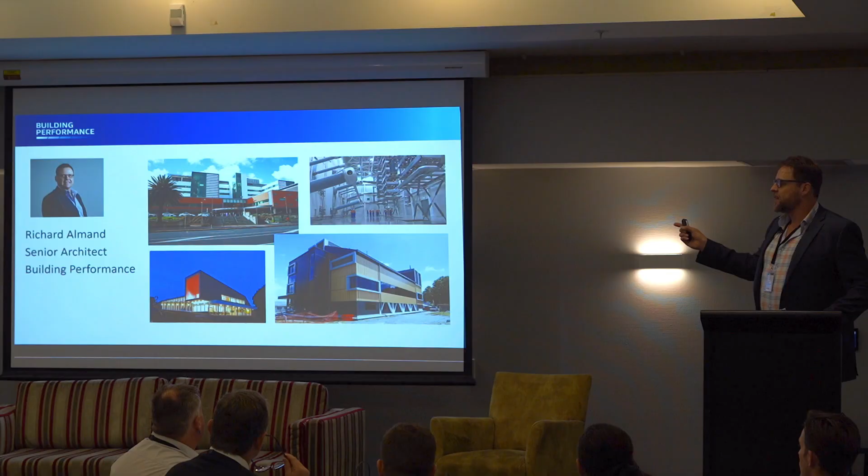No takers? That's Hayward's substation, where they transfer the DC current coming from Benmore back into AC for the national grid.

I say to people at barbecues, when they ask what I do, I just say I twiddle the knobs on the building code - it's the simplest way to explain it, because that's pretty much what we're trying to do.

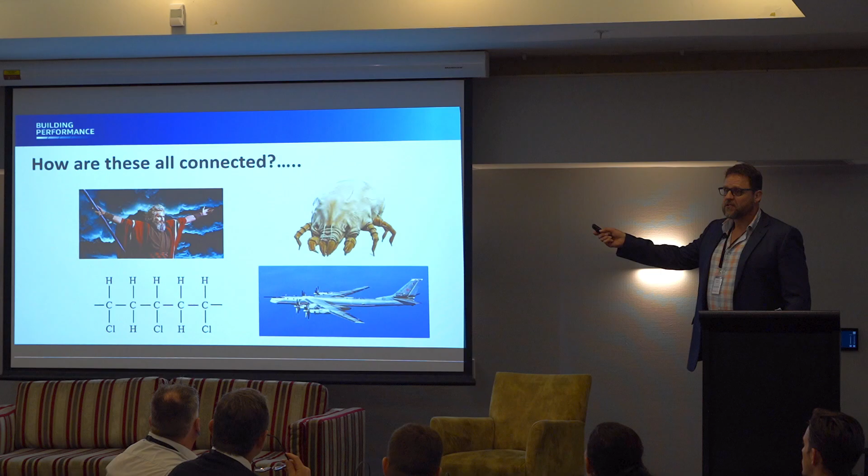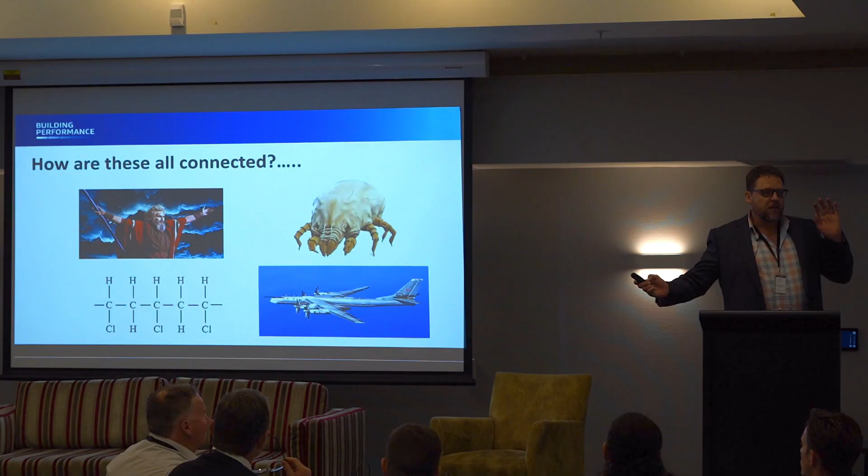To me, internal moisture is really important - the control of internal moisture, building code clause E3, is really understated. I'm always throwing my toys out at work because it feels like seismic strengthening and fire get all the attention and we don't get enough.

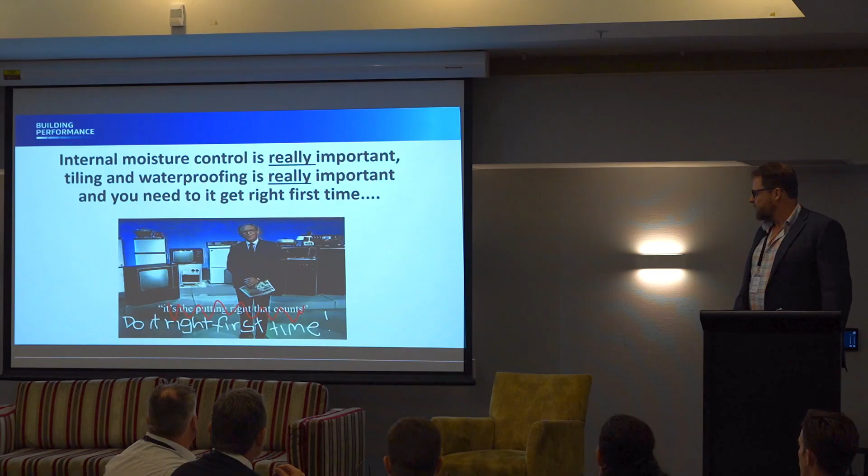Does anyone remember this guy? Some of you must do - please don't leave me hanging. I'm not the oldest here. L.V. Martin, that's right. His motto was, it's the putting right that counts. But really, let's do it right first time, because it really touches on the expense of fixing it up once it's already done.

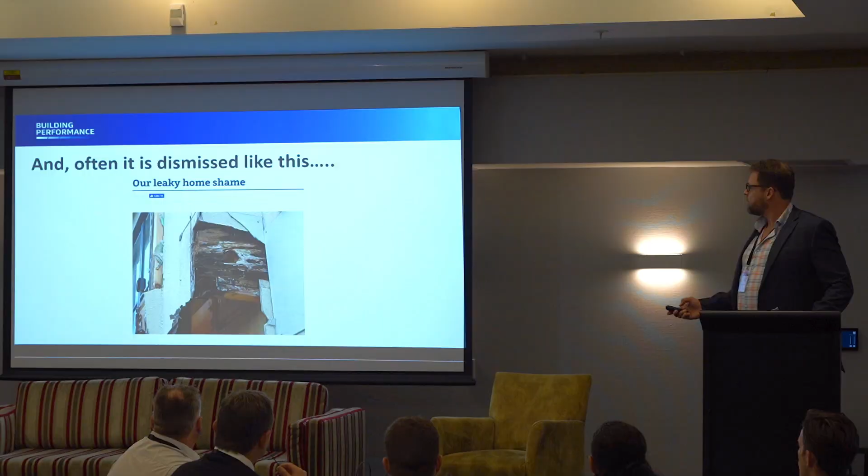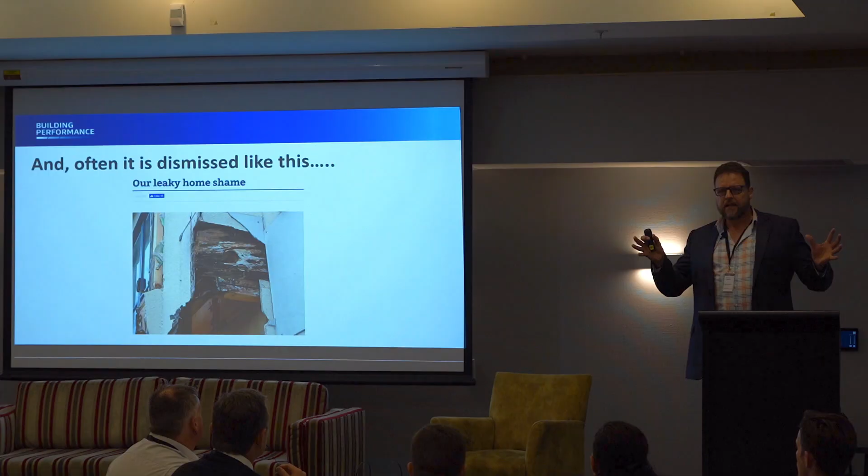We've all seen images like this - it feels like every week there's a new hospital or school or some building somewhere that hits the headlines, covered in black mould. It's always happening, and it's really a lot worse than we actually think. It's often dismissed as an external leaky building problem, coming under the whole umbrella of the leaky building crisis, but it's often not caused by that.

What about stuff like this? This is a bathroom, and you can clearly see all the black mould on the inside of the lining. That's had a leak for some time, and it's been collecting black mould.

BRANZ, the Building Research Association, who have someone here - every 5 years they do a housing condition survey. This was from their survey in 2018 or 2015, I'm not too sure. They found that 49% of all houses in New Zealand have visible mould. So pretty much half our houses have visible mould, which I think is appalling, and we'll try to quantify how appalling it really is.

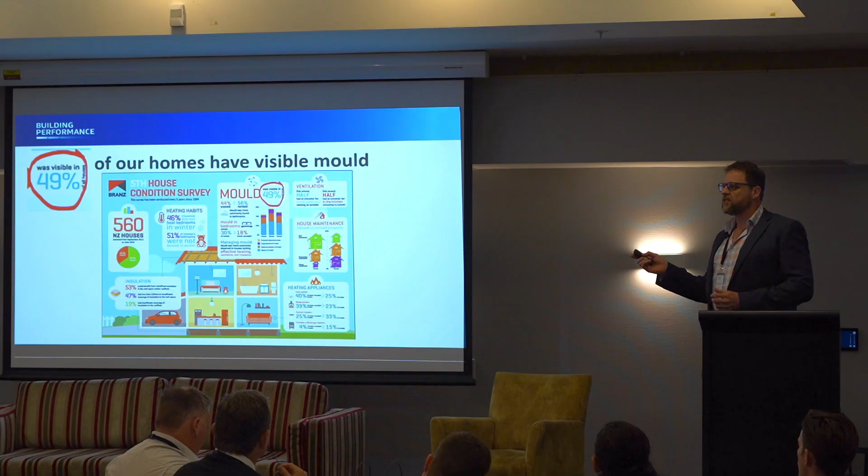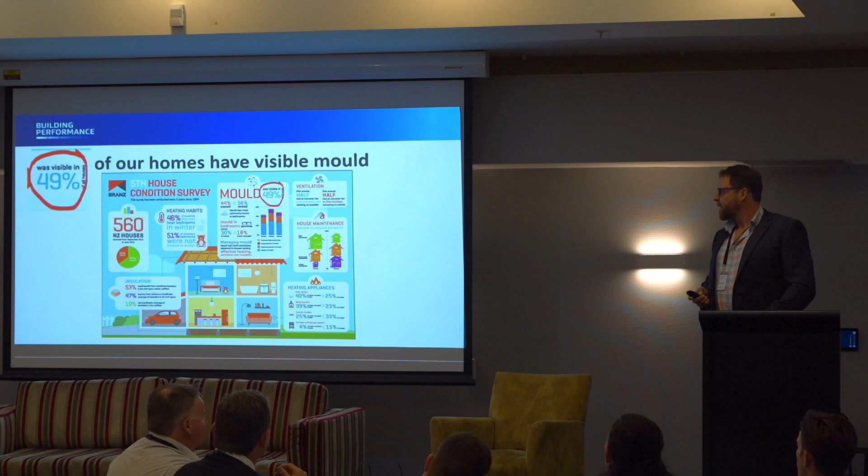Since then they've done another housing survey, and that number has dropped - for full disclosure. Does anyone want to guess what it's dropped to? 42%? No, 48%. So in 5 years we've improved 1%. At that rate, in about another 200 years, we should have no black mould in buildings.

So this is the problem here - it's actually quite a pretty photo, but this is Stachybotrys chartarum, black mould. This is a real problem, and a really bad piece of work. It's not like the mould on your cheese.

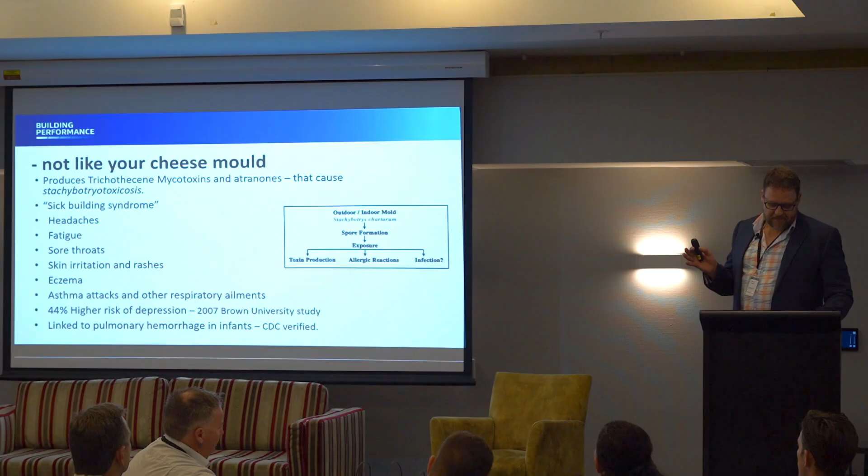This stuff produces - bear with me here - trichothecene mycotoxins and atranones, which cause stachybotryotoxicosis. Basically, the mould growing on your walls releases spores, and these spores contain chemicals. This is where it relates back to one of the first photos - these same chemicals were used by the Soviet Union on Afghanistan as chemical weapons back in the Cold War days.

These chemicals in mould spores cause what's often called sick building syndrome. It's kind of a blanket term, but it causes headaches, fatigue, sore throats, skin irritations and rashes. It encourages dust mites, eczema, asthma attacks and other respiratory illness.

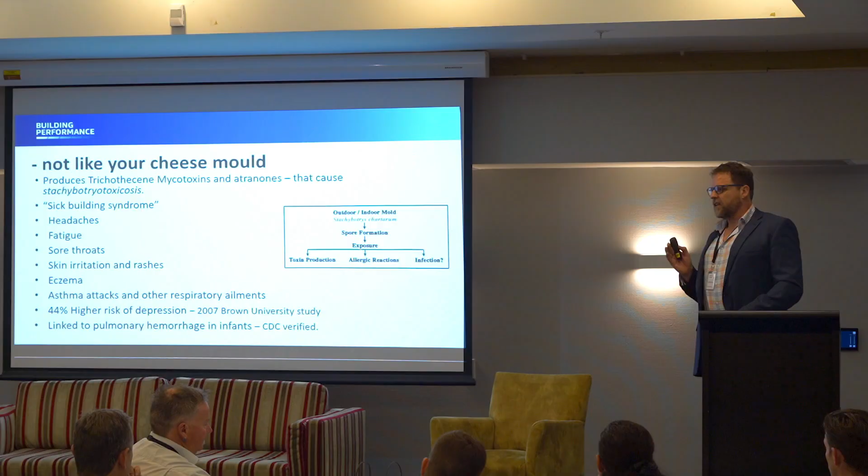You have a 44% higher risk of depression if you're exposed to these toxins - that was a Brown University study from 2007. It's also linked to pulmonary hemorrhage in infants, verified by a CDC study. So black mould and its toxins are really bad, and we have a lot of it in our buildings.

It's not a new problem. As long ago as 5,500 years ago, ancient Sumerians used naturally occurring bitumen to protect their houses from rising damp, because they were aware of the problems that moisture in buildings can cause. The ancient Greek historian Herodotus confirmed bitumen was used to prevent dampness in ancient Babylon.

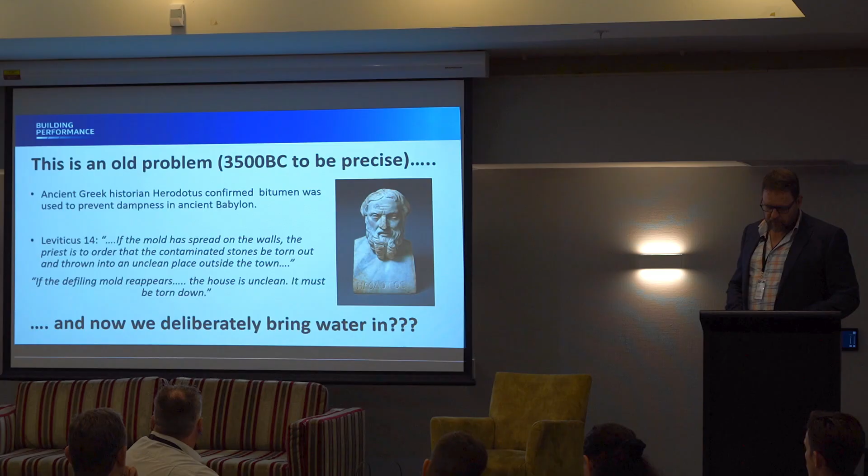Even in the Bible, the book of Leviticus says if the mould has spread on the walls, the priest is to order that the contaminated stones be torn out and thrown into an unclean place outside the town. If the defiling mould reappears, the house is unclean and must be torn down. So way back when, they knew mould was a real bad issue.

And we're still putting up with it. Admittedly, this was mainly external moisture, but they didn't have dishwashers and they didn't have internal showers in those days. Nowadays we are bringing water deliberately into our buildings, so we're kind of making the problem worse.

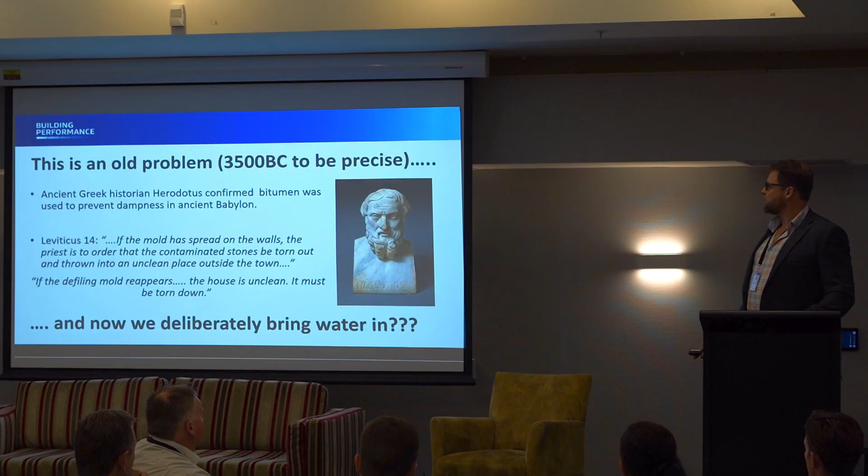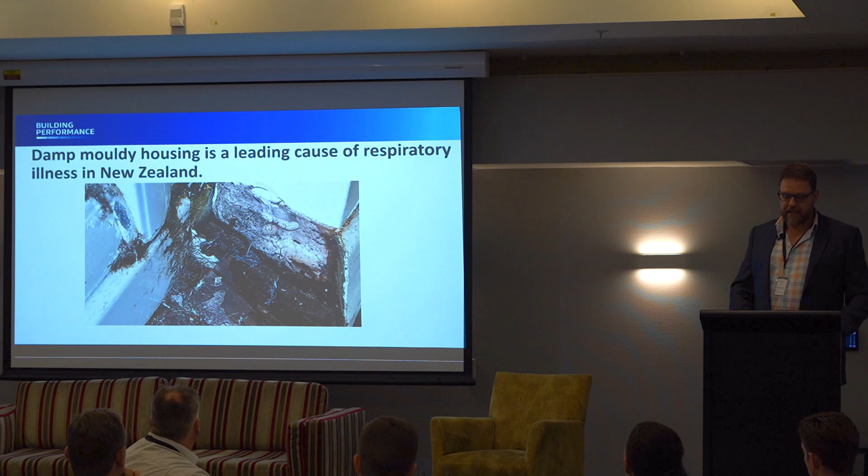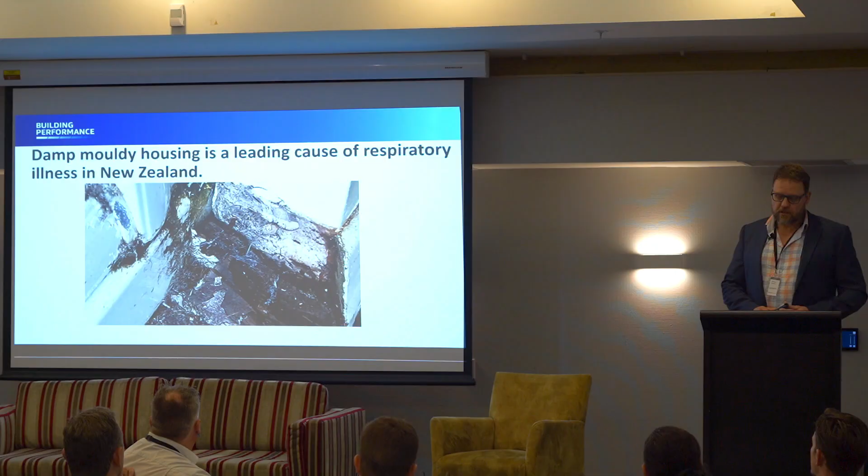We know damp and mouldy housing is a leading cause of respiratory illness in New Zealand. This is a photo of a Dunedin flat, outside the shower - you can see the corner of the shower there, and the floor is black with mould and rotted through. So it's causing a lot of respiratory illness.

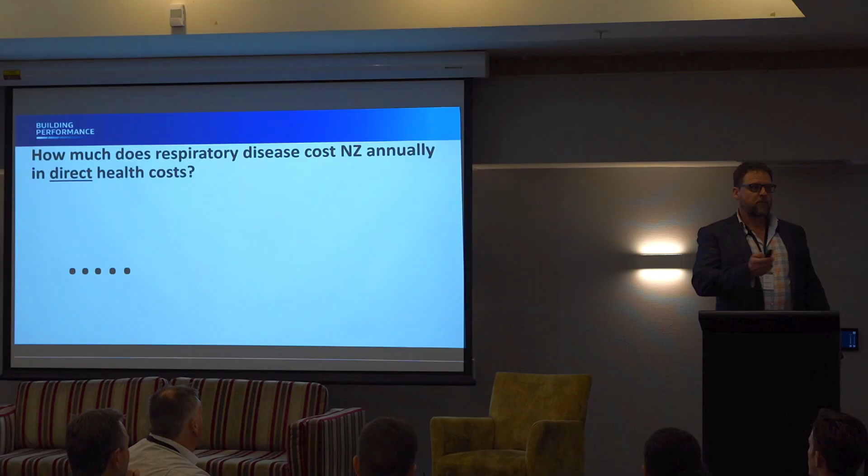Let's put some numbers around it. How much does respiratory illness cost New Zealand annually in direct health costs - just the direct cost of being in hospital or treated by a doctor over a year? Anyone want to hazard a guess for a chocolate bar? 40 million? Not even close. Higher? A billion? No, not quite. It's 575.6 million a year - that's direct health costs.

We already know our health system is under real stress. I'm not saying that's caused solely by black mould or poor tiling - not even close. But what I'm saying is every little bit helps, and if we fix some part, it's going to have some positive implications for the country.

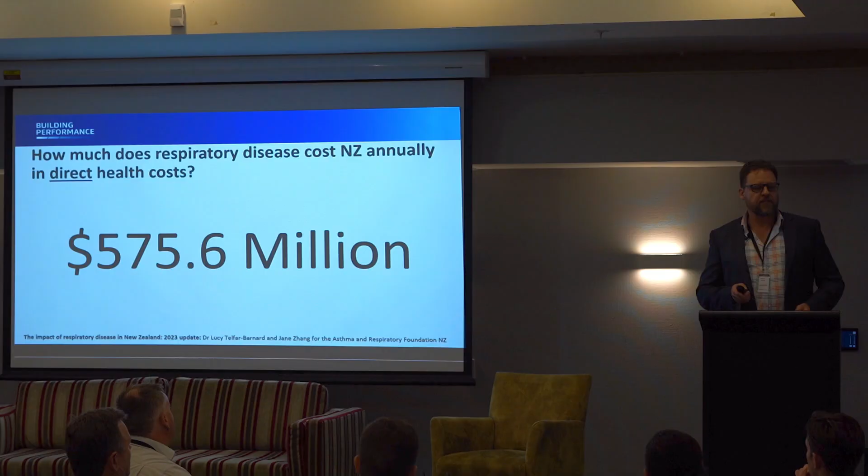So that's just direct health costs. Let's talk about indirect health costs. This was an Otago University study from 2023. I don't know quite how they came up with what's direct versus indirect, but it includes lost productivity, and if you die, it includes your funeral and whatever other costs get chucked in.

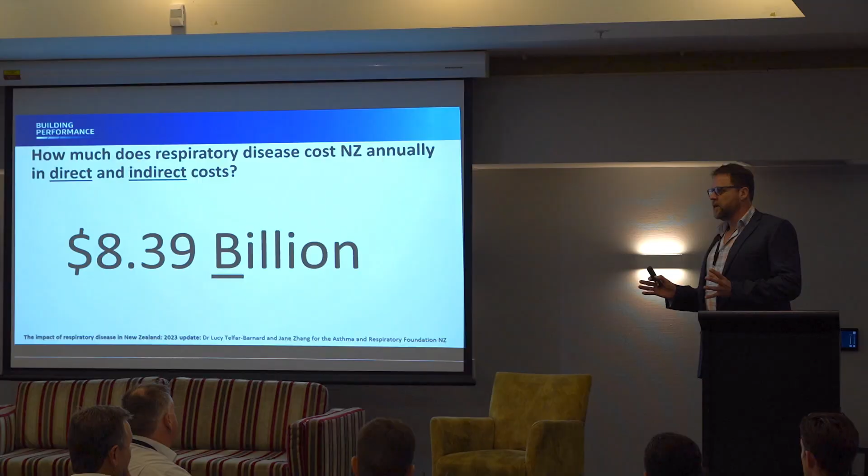Does anyone want to guess? I'll give you a clue - it includes the 575 million, so it's higher than that. Anyone want to guess to within $1 billion for a chocolate bar? 10? Pretty close, I'll give you a chocolate bar for that. It's 8.39 billion with a B. That's a big cost, purely because of respiratory disease, and at least part of that is avoidable if we manage internal moisture properly.

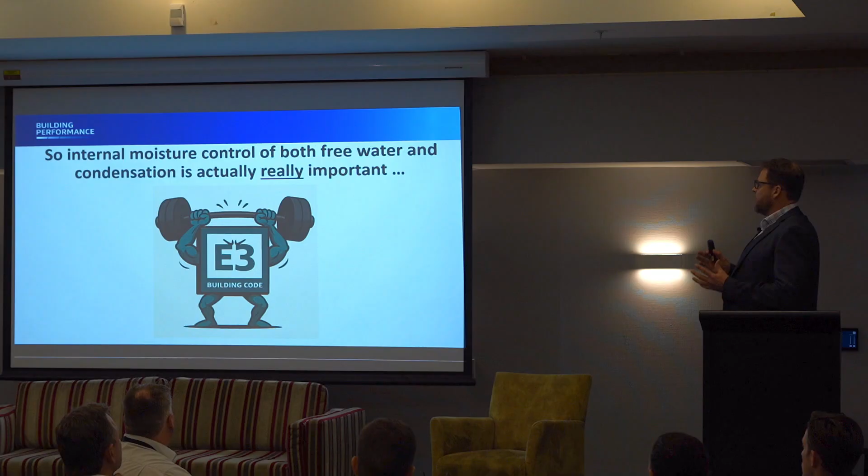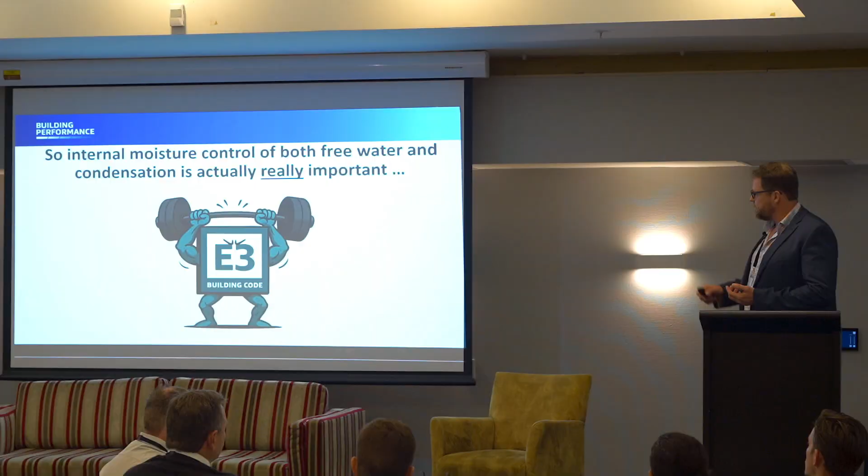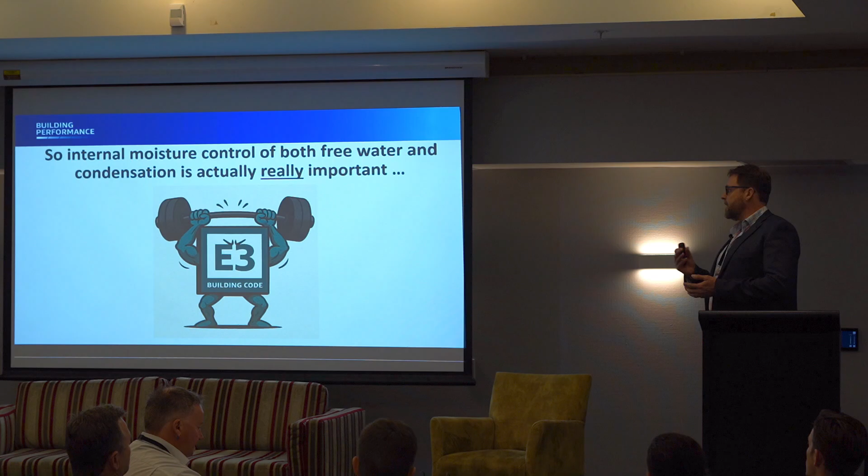So internal moisture control is really, really important. It's both the control of free water and condensation - the water vapour in the air that condenses in our walls and on our surfaces - that contributes to mould. E3, poor little fella, is actually doing a lot of heavy lifting because the mechanics behind free water causing mould and condensation are completely different, and yet we only rely on one internal moisture clause of the building code.

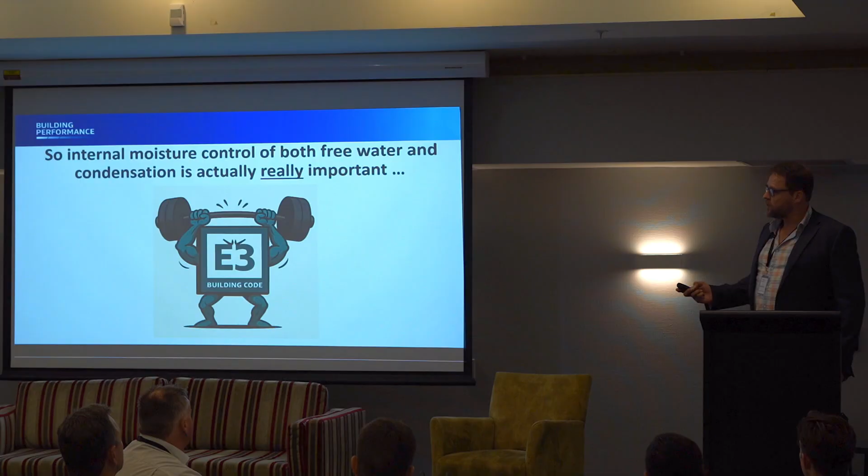So buckle up guys, it's about to get insanely boring as I talk about the building code. This is the building code triangle. It's not a particularly good graphic, I don't particularly like it, but we seem to throw it around quite a lot at MBIE.

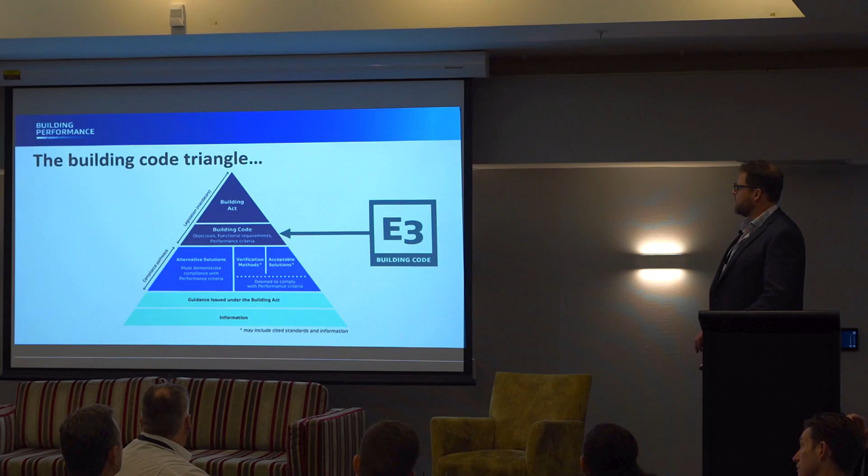All it really shows is a hierarchy of where things stand. At the top we've got the Building Act proper, and at the bottom we've got the lowest of the low, which would be the information. E3, the building code clause, sits alongside 30-something other clauses in that second tier down.

So these bits are mandatory, the Building Act and the Building Code. If you build a building, it must comply with the Building Act. Makes sense. It's a big document, about 400 and something pages. If I had to summarise it in a few words, it would be: keep it up, keep it dry, and keep it healthy. I don't know if we're doing all of that as well as we could.

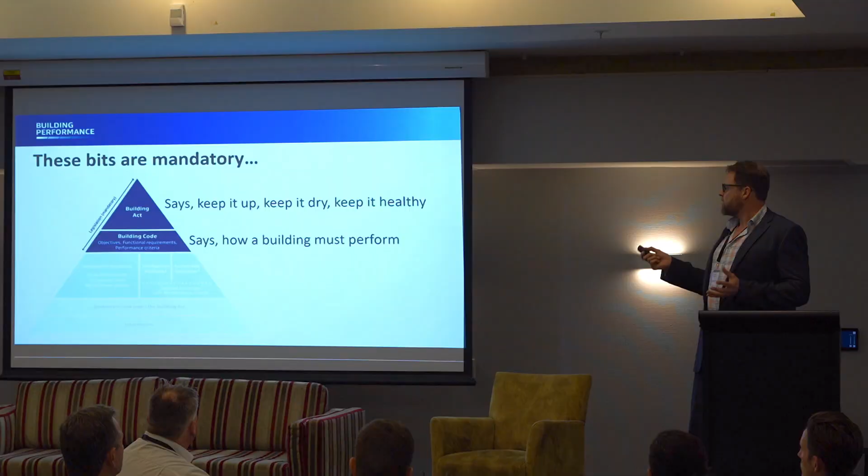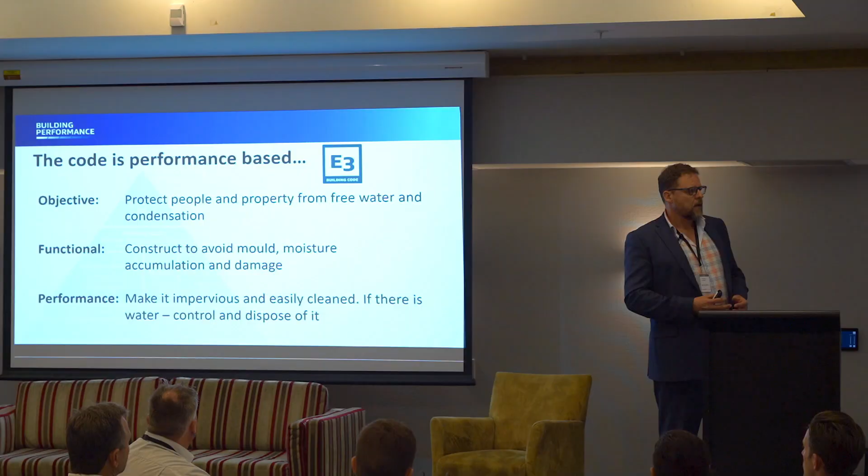Below the Building Act we have the Building Code, and that's also mandatory. It says how a building must perform. We are lucky in New Zealand, we have what's called a performance-based building code, whereby we don't tell you how to do it, we don't say you must build your house exactly like this. Instead, we say when you build a house, it must meet these objectives, it must perform this way. The performance-based building code breaks it down into 3 parts.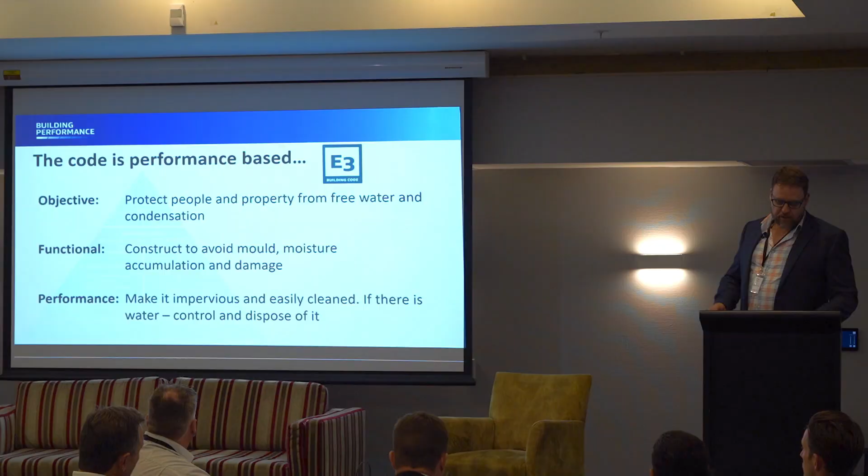It breaks down into the objective, which is to protect people and property from free water and condensation for internal moisture, for example. Then we have a functional requirement. Well, what does that mean? You construct to avoid mould, moisture accumulation, and damage from that moisture accumulation.

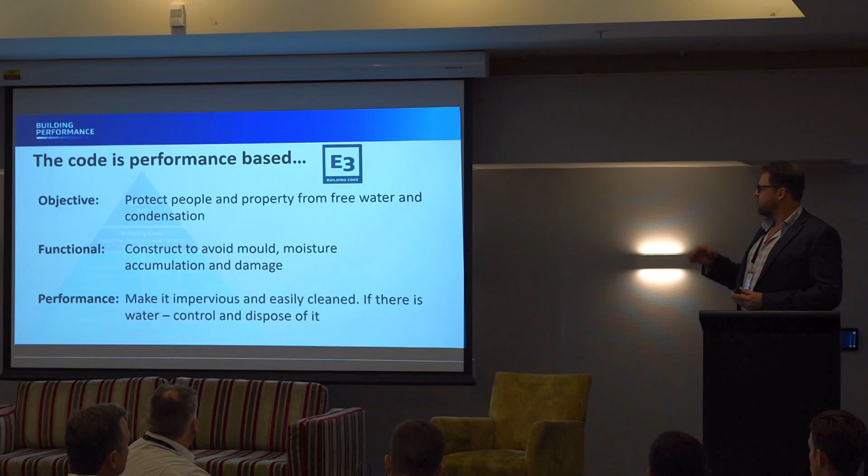So when you're getting your building consent assessed, that's what the BCAs are thinking about, how it meets these performance criteria. You have the objective, the functional requirement, and then the performance. Well, how do I actually do this? Make it impervious and easily cleaned.

If anyone spent any time with the building code clause E3, they will be sick to death of 'impervious and easily cleaned' because it's thrown about quite a lot. And if there is water in your building, it's not a problem, just control it and get rid of it. Don't let it accumulate and cause mold. So it's really quite simple.

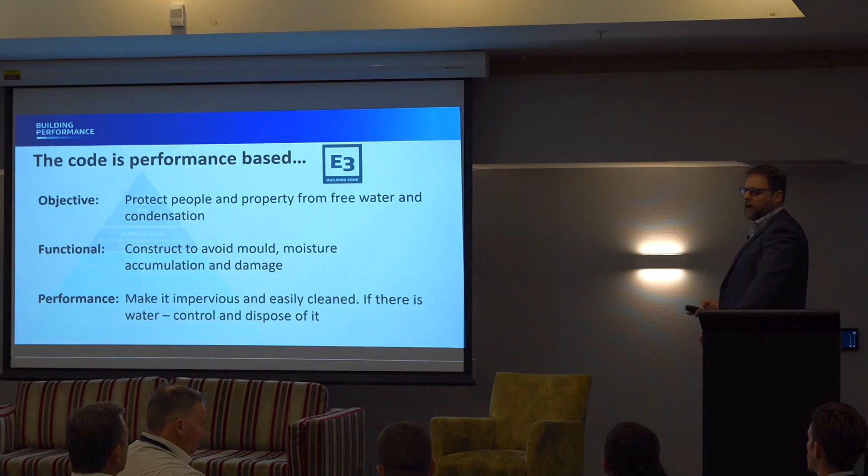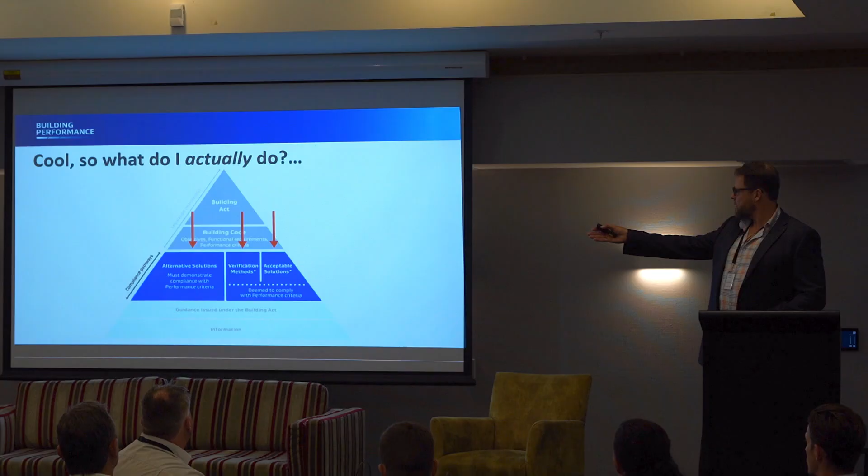But unfortunately, this is where the wheels start falling off. As a designer, I've been told: make it stand up, don't let it fall over, keep it dry, keep it healthy. What does that actually mean? What do I actually do? And this is where we get to this next tier here, the compliance pathways, and these are how you meet the building code.

To start with, we have the verification methods. These are generally calculations or some computer modelling. We don't have one for E3, so we don't worry about it. We will do - we're doing some work with BRANZ at the moment, and we're hoping to have a verification method at some time in the future. At the glacial pace that government work moves, I don't know when the future is, but we will have something for you.

These are the acceptable solutions. We have 2 acceptable solutions - these are like the recipe. If you follow the acceptable solutions, you get a building consent. We have E3AS1, which has been mainly unchanged since it was written, however many years, 30 years, and is probably needing, as we'll see, a fair bit of updating. The second acceptable solution is the IWAM Code of Practice, the Internal Wet Area Membrane Code of Practice.

So we cite that as an acceptable solution called E3AS2, and this is how they compare. I've just got the 2 acceptable solutions here. E3AS1 meets all the performance requirements of clause E3, allegedly, including internal moisture caused by vapour and condensation, E3.3.1 all the way through to E3.3.6, and it covers tiles and vinyl. Now, I've used little green ticks there that are smaller because it doesn't comply anywhere near as well as E3AS2.

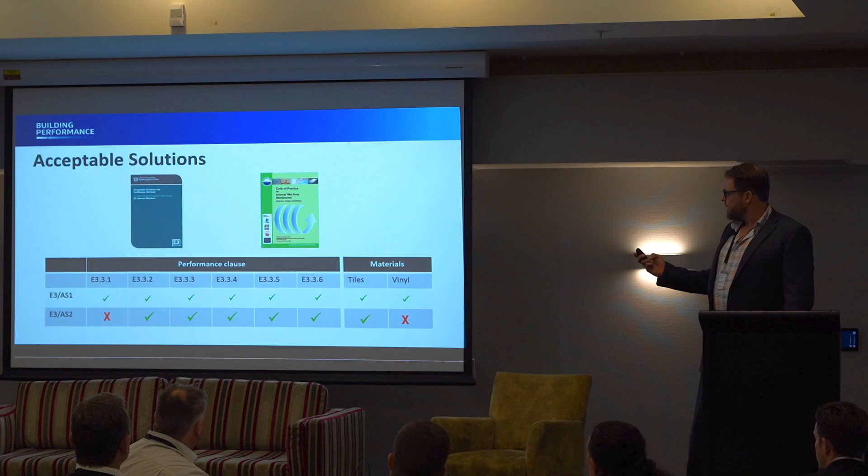If you don't use a verification method, which we don't have, or an acceptable solution, which we do have two of, anything else is called an alternative solution. There's two things to alternative solutions. Firstly, designers and architects run a mile from them because they think it's really hard. They're not really that hard. It's not a defined term, it's just anything that doesn't fit into the other two categories.

You can demonstrate compliance of an alternative solution by saying our design compares quite closely with a current document, like the acceptable solution. It might be in-service history - for example, timber windows are an alternative solution and they've been around for years, no one ever has a problem accepting them. It might be an expert opinion or a producer statement - basically someone demonstrating that it meets the code requirements, and that's accepted by the BCA.

So there's a lot of responsibility on the building consenting officers around some of these, and then we go all the way down. Alternative solutions might be helped by a product certification or an MBIE determination.

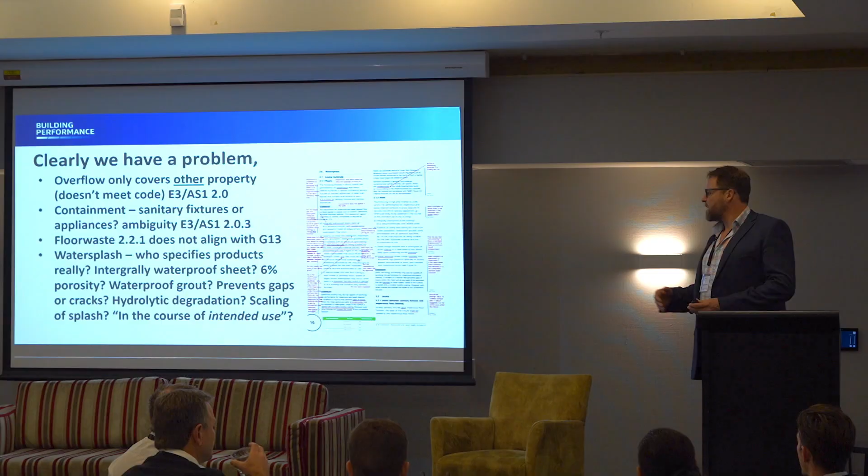And scaling of splash - the acceptable solution assumes a dishwasher has as much splash as a shower, and that's not right. I think in Australia they rate the amount of splash required, so maybe we should start thinking about that. So these are mainly notes about stuff we need to look at - there are the odd things that are wrong, and kind of markups of how we can improve this.

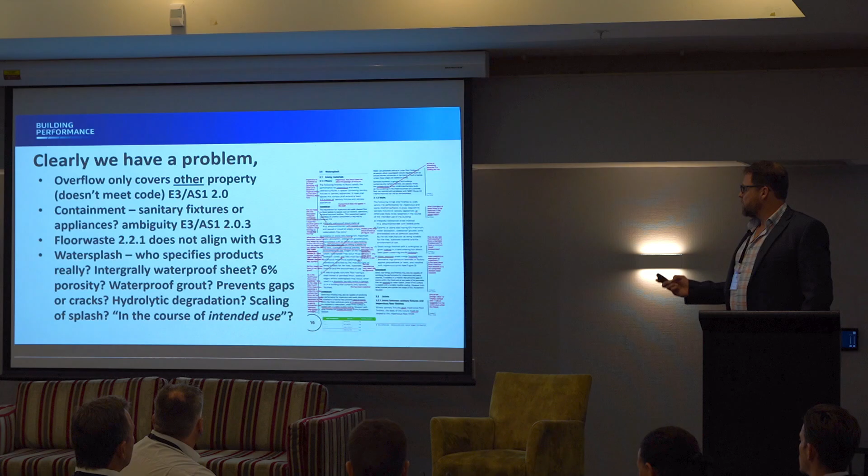And of course at the bottom it says 'in the course of intended use.' Now, intended use is a defined term under the building code, and it's like - can't we do something better? So that is the acceptable solution - we are currently working through it. At some point we will be updating it. Spoiler: updating waterproofing isn't as glamorous or as clickbaity as doing something else.

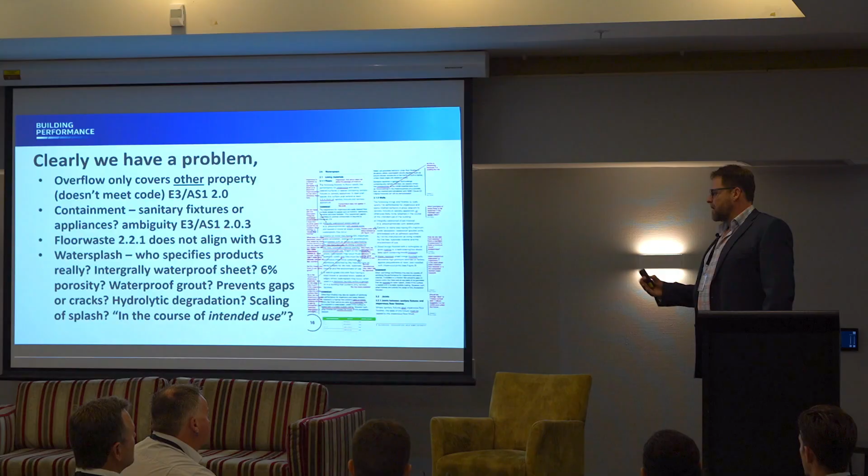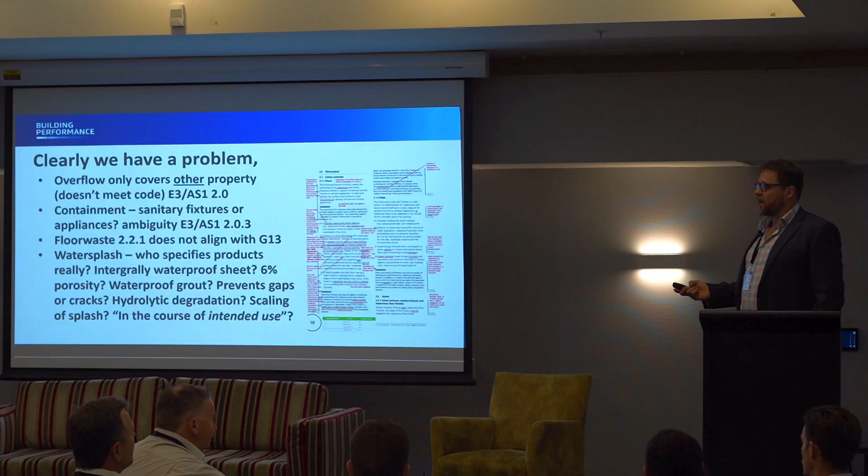So sometimes it takes a back seat to catastrophic failures like earthquake design or fires. We're struggling to get traction, but I think we're getting a bit of political will now, especially with the LBP stuff coming in for waterproofing. People are recognising you've got a problem, so that's good. It's not only with the acceptable solution - we have a problem with the building code as well.

We say protect property from damage, but not your property, only the amenity for your property. So what does that mean? You've got to work out the objectives, meet the functional requirements, meet the performance requirements, which I touched on earlier.

Does it exclude if we have a catastrophic failure of pipes? I mean, you can see it's just endless. There's a whole lot of thinking that has to happen around this, and we're starting out on that, so bear with us. It's not as easy as it sounds. Every time you do something, there's always an equal and opposite reaction, isn't there?

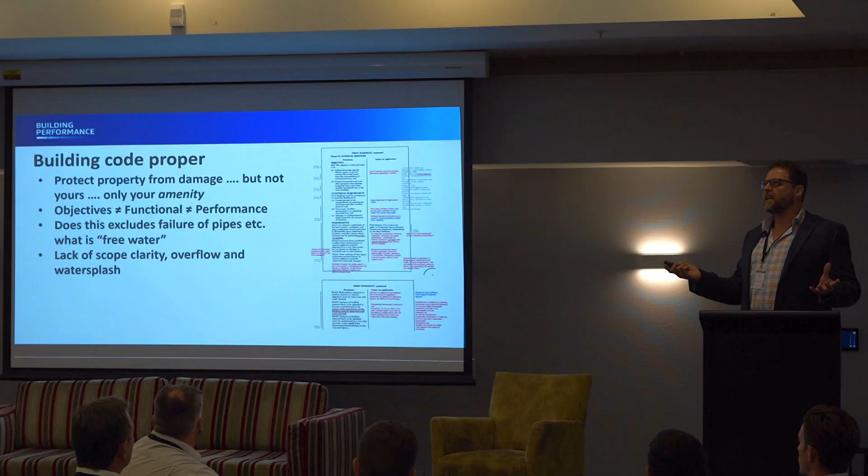So, for example, let's take this wording - a lot of you will cringe when you hear it - impervious and easily cleaned. This is a BRANZ drawing, so hopefully it's correct. What does impervious and easily cleaned mean here?

Here's our easily cleaned layer, and here's our impervious layer underneath it. I don't know if the surface is impervious and easily cleaned. The system works well, don't get me wrong, but they're not impervious and easily cleaned. So you have to do a lot of thinking around making the terminology match up as well.

One of the recent updates we did to E3 - I'm not saying we, I mean MBIE - was to remove some wet area finishes from the acceptable solution, such as cork tiles with polyurethane on them and some timber flooring finishes. That was a little bit controversial for some people.

The reason we had to remove it was because it didn't meet the building code proper. So the acceptable solution said, hey, use cork tiles and slap on layers of polyurethane, but it didn't make an impervious and easily clean surface that met the durability requirements, which is B2. So you can still do stuff, you can still use cork tiles, as long as you can demonstrate impervious and easily clean. The acceptable solution won't be able to do that for you, but you can. There's ways and means.

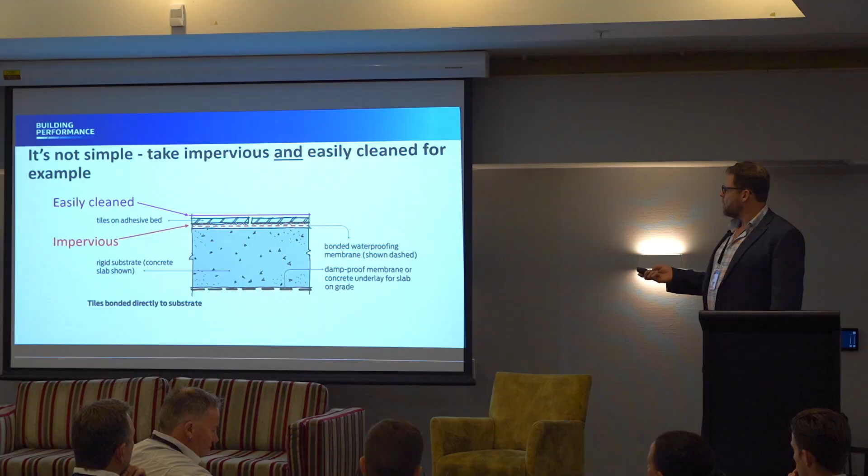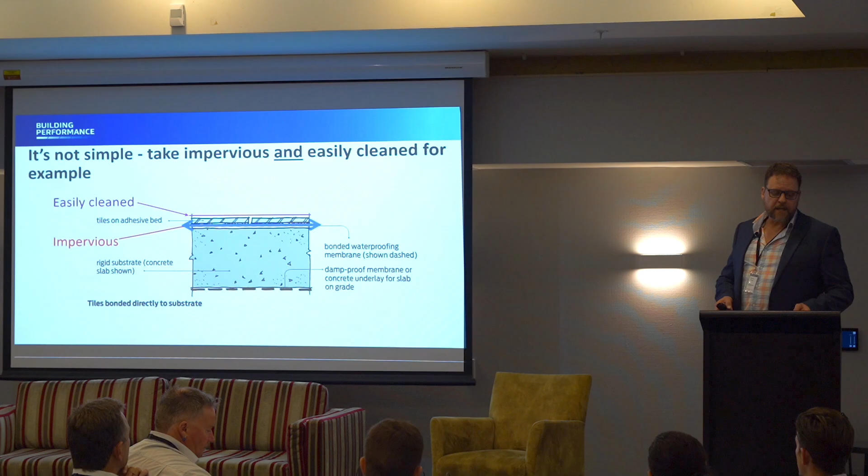So we've got this impervious and easily clean layer. Well, what could possibly go wrong with that? We could trap water under that tile and above that substrate. We're touching on some of the stuff Brendan so kindly stole from me - stole my thunder. So you can get moisture travelling through there, and these are unintended consequences. So for every part of the code or the acceptable solution we change, we have to think through: what could go wrong and how can we fix it.

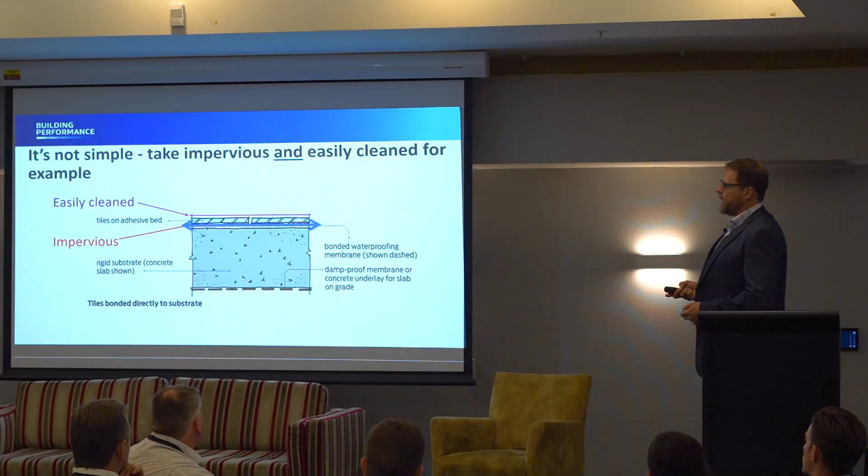This is a photo, another thermal image - this one's probably better than Brendan's other one. This was from a guy called Frank Modus, who's a waterproofer and a tester from Australia, he's on a standards committee with me. This shows again the spot fixing of tiles and how you get the channels forming behind it. And again, you see E3.3.6: must be constructed in a way that prevents water splash from penetrating behind linings and concealed spaces. So clearly we have a concealed space here which will get penetrated by water.

Now this is where we go back to something I mentioned earlier, the waterproof grout. Obviously your tiles are very rigid, and you've got two tiles together and you're grouting over the top of them, joining those two tiles with your grout, which is great - everyone's happy. You can see on this thermal image though that grout is not touching that back wall, otherwise it would show as purple. So you've got the grout held between two rigid layers.

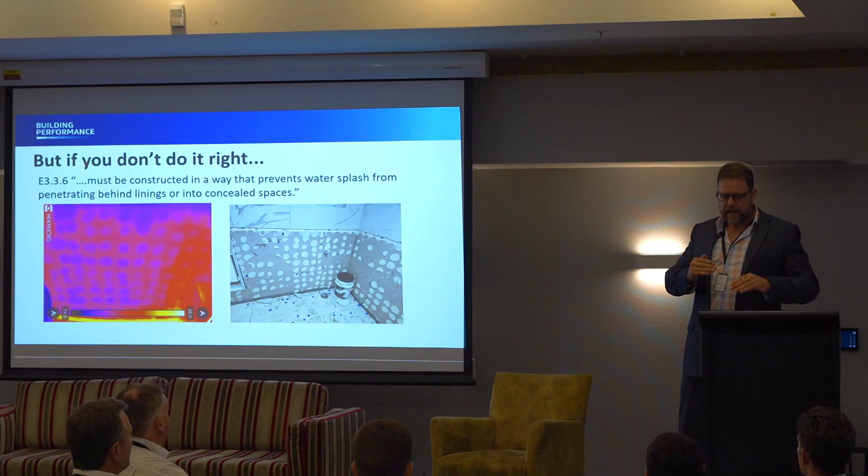It's your epoxy waterproof grout, but it's all built on a timber frame building, which we all know are quite flexible - it's one of the good things about timber frame buildings, they're flexible. So we've got rigid grout in the middle, all on a flexible substrate, and so it's going to crack and let water penetrate behind it. The simple way to prevent that, obviously... it doesn't really happen.

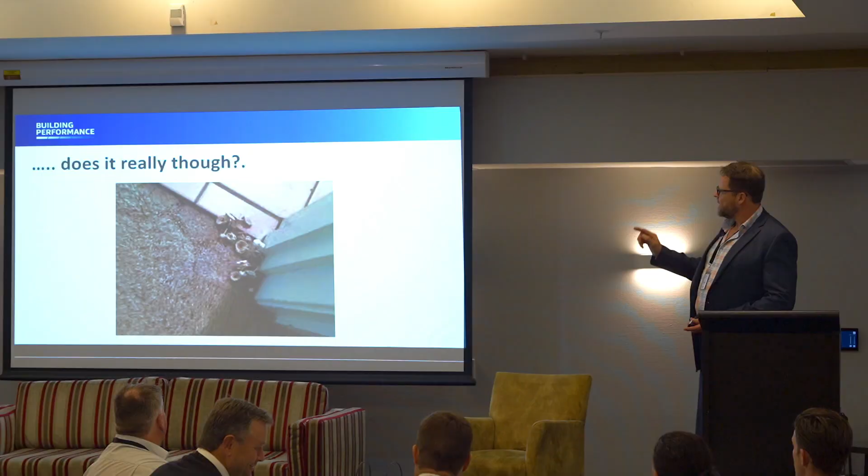This is another student flat - I think this is better than Brendan's one. It's got mushrooms growing. So obviously water's been coming under those tiles, hitting the carpet and growing mushrooms in the doorway.

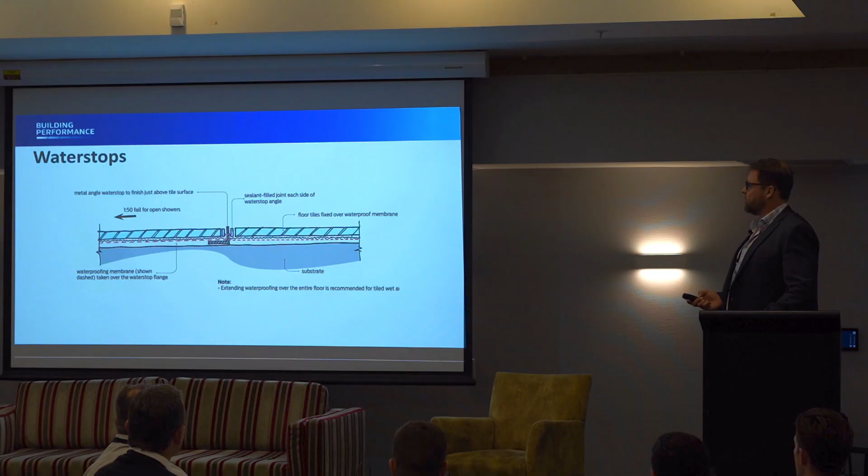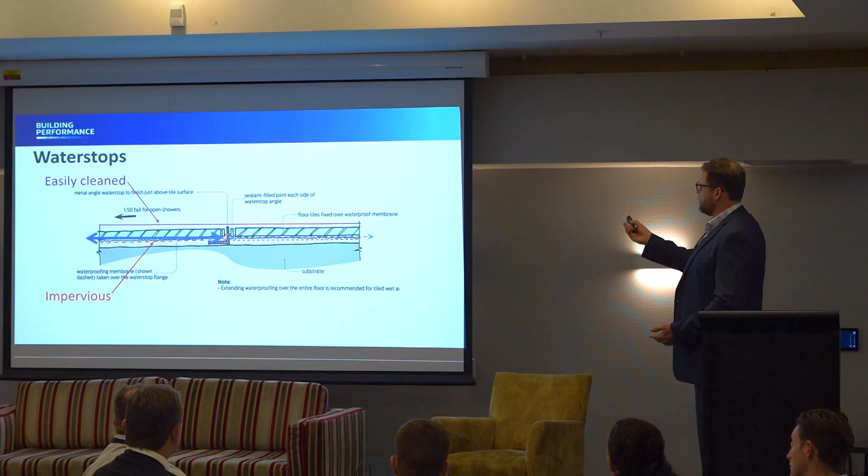A simple way to prevent it is water stops, and we'll touch on that. These are required in E3 AS2 and AS 3740, which I'll touch on soon. Again, you have your easily clean layer, don't have a problem with that. You have your impervious layer, don't have a problem with that. Now we have our water travelling back and forth in the substrate. We can contain that, and yes, you might get a little bit of water there, but you should be able to minimise that with evaporation.

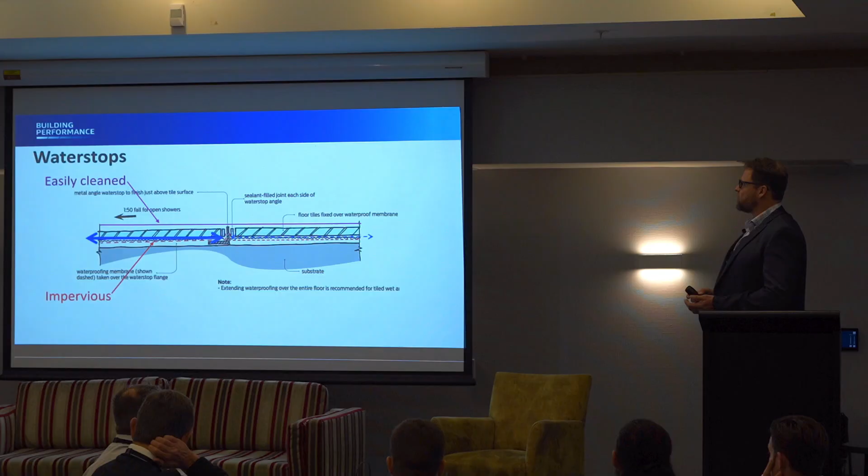So I suppose the point of all this is to say we have to be quite thorough and go through at a really microscopic level to assess any unintended consequences that come through as we update things.

We're also lucky now that we've got a thing called the Building Product Specification, the BPS, which basically says any standard cited in any acceptable solution will have a mirror document stating any international standard equal to, equivalent to, or better than that standard can also be cited. So we're going to have citations to a lot of additional standards, which will give the industry a lot more information to rely on. There's been a real information vacuum, and hopefully we're going to fill that.

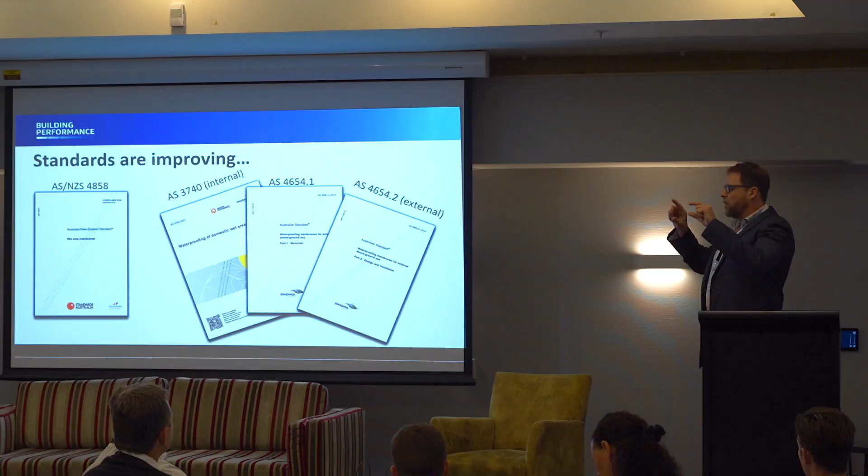Next, on the Standards Committee updating these, BD38, the Australian Standards Committee updating these standards. It says there's 4 up there, but in effect there's only 3: AS 3740, AS 4858 on the far side, which is a material testing standard, and it's pretty much the same as the one in the middle, AS 4654.1, the Australian version. They're almost identical—the only real difference is they use different sample shapes. One uses a rectangular shape and stretches it back and forth, and one uses a dog bone shape and stretches that back and forth, so you get different readings.

So the manufacturers have to do 2 different tests essentially for the same stuff. Another interesting thing with these material standards is when we test our waterproof materials, we test them for vapor permeability, we test them for water absorption, but we don't test them for water permeability. So essentially we don't test if our waterproof membranes allow wet water to pass. But we test all sorts of other stuff.

So that's all getting updated in 4654.1, and that will replace AS NZS 4858, and we'll have just one standard for material testing, with all sorts of additional tests for the chemicals that are required. A lot of people want acid tests for some of the cleaners coming out now that use citric fruit juice, orange peel, whatever it is, and also root penetration tests. So essentially the middle one and the far end one are going to become the same one.

We're going to have AS 3740, which I'm not involved with—that one's getting updated, and that's your internal detailing standard. It's a pretty robust document at the moment, although some of their drawings are quite imaginative, because we do things differently here compared to Australia. That's all getting fixed. And then AS 4654.2 is the external waterproofing one, so basically we're working on it.